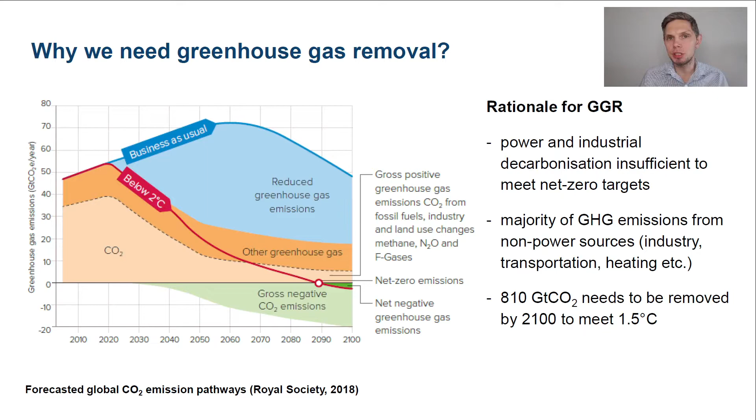So what is direct air capture? Well, direct air capture works in a very similar way to trees, and as you know, I love trees. I support planting trees, but we have to be realistic about how much we can actually achieve with planting trees. So we need to have alternatives. So direct air capture works as a kind of alternative engineered solution that removes much more CO2 than a single tree.

That's why most of the research that we do actually focuses on developing new materials, developing new ways to capture carbon dioxide from the air, and developing new equipment. And that's the most difficult part. So once you actually capture CO2 from the air in the air contactor, you need to release that. And that's the second part of the capture process.

So the first part is removing CO2 from the air in the air contactor, where the carbon capture material gets in contact with the carbon dioxide in the air, and then you have to release that carbon dioxide from that material. That can be done using either electricity, heat, pressure difference or moisture difference. Again, that step is fairly energy intensive as well, depending on the layout of the plant that you might want to consider.

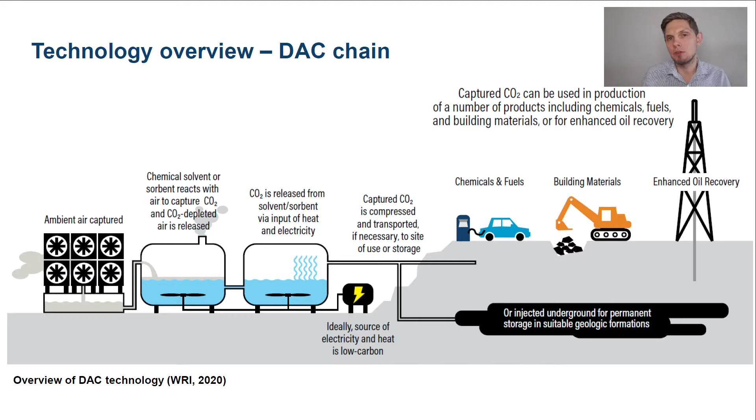But another opportunity is to store it underground, but we need to make sure that there is enough storage capacity to do it. Let me talk about the capture technologies, because that's where my expertise is right now, and this is something I'm very passionate about. In terms of direct air capture, we have two main archetypes that people talk about: high temperature capture and low temperature capture.

High temperature technology, like the Carbon Engineering concept, relies on an established process. You have the established Kraft process, where you use sodium hydroxide, also potassium hydroxide, to capture CO2 from the air. You produce sodium carbonate, and that sodium carbonate is regenerated using calcium hydroxide in the Kraft process, producing calcium carbonate.

This technology uses natural materials, which is quite promising, and uses existing equipment to some extent. The air contactor was based on the cooling tower, so that's a modification of existing equipment, which is very good. The only challenge and opportunity at the same time is that the regeneration of sorbent requires high temperature. In the calciner, you have calcium carbonate, which you have to calcine at 900 plus degrees Celsius, which requires combustion of fuel.

And that's the main challenge of that technology, because you have to either use fossil fuels to actually run it, or any sort of green fuel like biofuels, biomass or so. There is also potential to integrate that with solar energy, but that would add to costs quite significantly, I think.

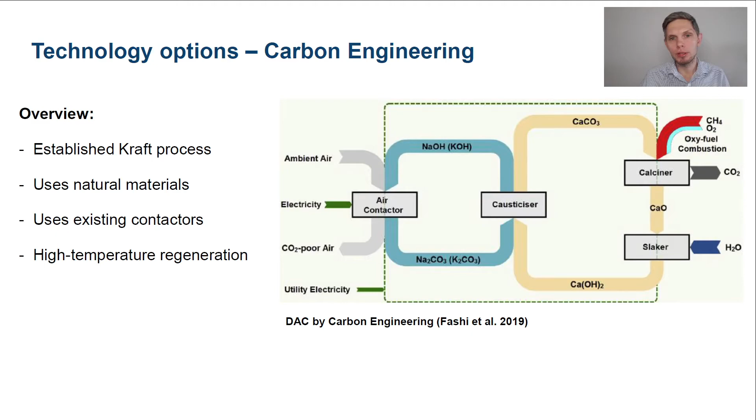Anyway, this high-grade heat, of course, it's a challenge to provide it because it's high temperature, but there is also an opportunity on the other side because you can integrate the waste heat recovery system and produce a useful amount of energy out of that process. On another end, we have low temperature direct air capture technologies.

For example, the ones that are developed by Climeworks or Global Thermostat. And these technologies utilize amine-based sorbents or resins to actually capture CO2. The operating principle is a little bit different because in this case you can have a single reactor that captures CO2, and once your sorbent or your capture material is saturated, you switch the conditions in the reactor and you release CO2. So it's either temperature swing or pressure swing adsorption.

Also, there is a potential to do moisture swing adsorption where you actually change the moisture content, and by doing so you regenerate the sorbent as well. The benefit of that technology definitely is that it's a low temperature system. So it requires temperatures of about 80 to 100 degrees Celsius, which makes it good for retrofitting within the existing industrial systems, for example, where you have excess waste heat. Or potentially it can be integrated with geothermal energy systems.

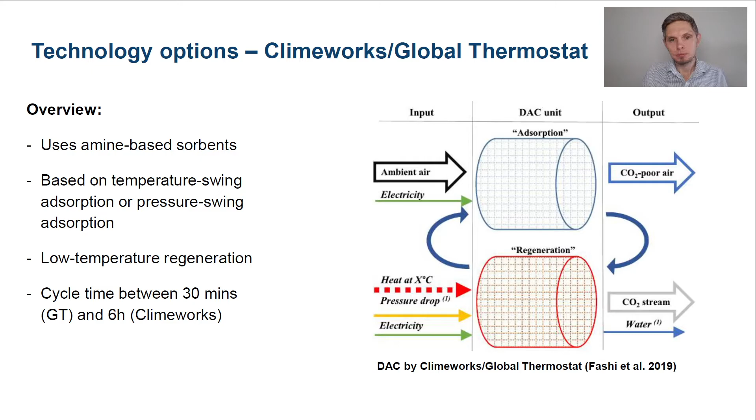Comparing those two archetypes, I collected data for those three companies that actually do direct air capture right now. So you can have a look at what are the main differences, and the main difference, of course, is operating temperatures. So you have 900 versus 100-ish degrees Celsius for low temperature direct air capture technology. The difference in purity I wanted to emphasize is, for low temperature direct air capture, you get in principle higher purity because you don't have any combustion products within your CO2 stream.

For high temperature systems, you would have combustion products if your energy in the calcination is provided by oxy-combustion of fuels. Energy requirements are broadly fairly similar. Of course, for Climeworks, I would need to add a range as well, but this will be somewhere between these two numbers. The only difference is that the Carbon Engineering system or high temperature system is a continuous process, so it's probably more scalable in my opinion.

Unit size can be bigger, while for low temperature systems you have cycles. So you have a cycling process where you alternate between adsorption and desorption of CO2. Of course, there is an opportunity to put several units in parallel, in series, that actually capture CO2 and ensure that you have continuous supply of CO2.

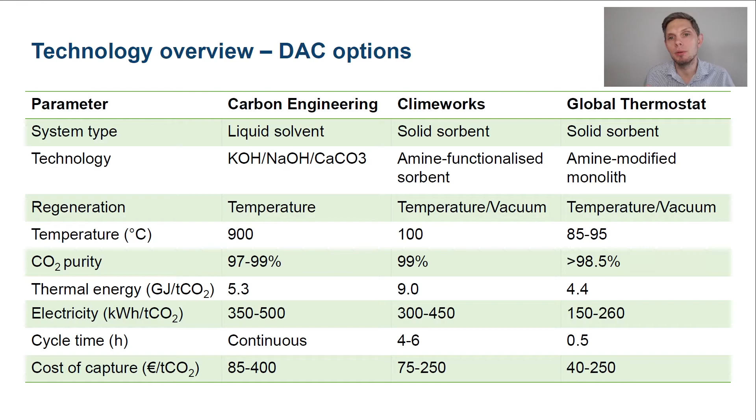So in terms of a high-level comparison, this is my personal view of how those technologies compare. High-temperature systems, in my view, are a little bit more scalable than the low-temperature systems. So definitely different markets for those. Energy requirement in terms of the grade of heat: of course, low temperature is better because you can collocate with other systems.

High temperature, again, is more energy intensive in terms of the energy grade, but then you can recover part of that energy as a part of the wider energy system. Purity is fairly comparable, again, depending on which technology you're going for.

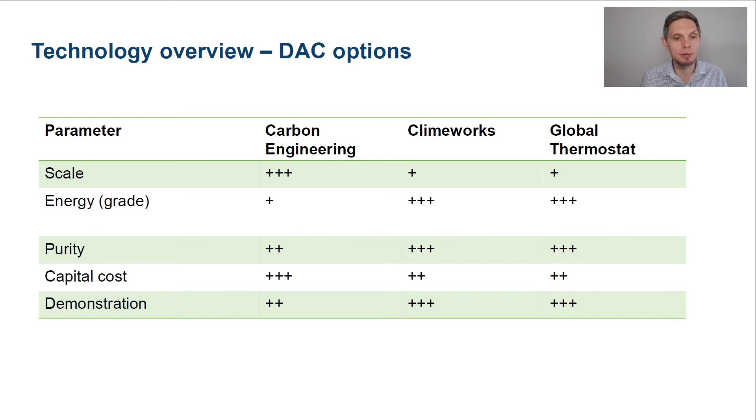Capital costs, I would see the low temperature will be a little bit cheaper than the high temperature, mostly because you have fewer reactors and you don't really have to have the combustion and all of this stuff. In terms of demonstration, I think the low temperature is a little bit further right now, more spread, more demonstration plants than the high temperature, but hopefully we see more of those demonstrations soon.

Now that we know how to capture it, I just wanted to emphasize there are existing markets for CO2 and there are different ways you can utilize CO2. There are either conversion routes or non-conversion routes. For the direct use of CO2, we can of course use it for yield boosting, say in greenhouses, to produce plants. We can use it for urea and fertilizer, which is also a good approach to actually use CO2.

But also new applications come up. For example, we can use CO2 as the working medium in supercritical CO2 cycles, which are much more efficient than conventional steam cycles, and that can of course increase energy efficiency and reduce our emissions in the first place.

In terms of conversion, as I mentioned already, we can produce fuels and chemicals. For fuels, the kind of projects that I'm working on look at how you can produce methane or methanol out of CO2, of course using hydrogen from renewables. What we need to make sure is that when we convert CO2 into fuels, we take the full life cycle analysis into consideration to make sure that this process is at least carbon neutral.

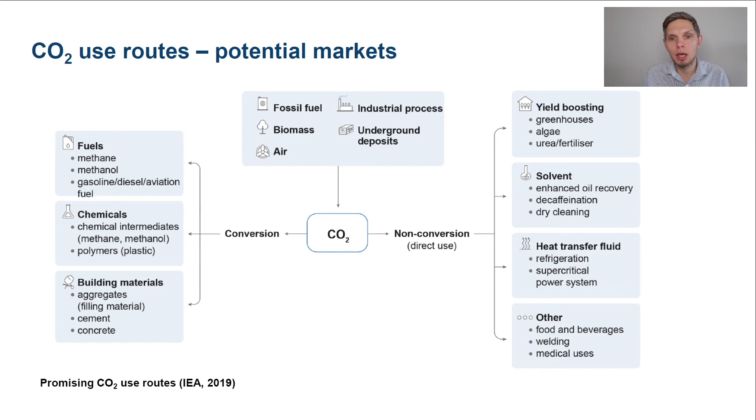Looking at the scale and environmental benefit, of course, production of fuels will have the largest potential to utilize CO2, mostly because we use so many fuels, in transportation, energy, we use fuels every day. So that's the largest potential in terms of utilization of CO2 for now. But in terms of the relative climate benefits, it's medium or moderate, I would say, because again, you would capture CO2, convert it into fuel, and then you release it again. So that could be a basis for a carbon circular economy in principle.

As I mentioned, a relatively high CO2 use is to produce concrete or aggregates out of the CO2 and use that for building materials, building roads, or something like this. This option has the largest relative climate benefit, mostly because you lock CO2 in. There are other opportunities for producing chemical intermediates like methanol, or converting those later into polymers. But then again, we enter into another issue of whether we should be producing even more polymers or plastic materials than we should be.

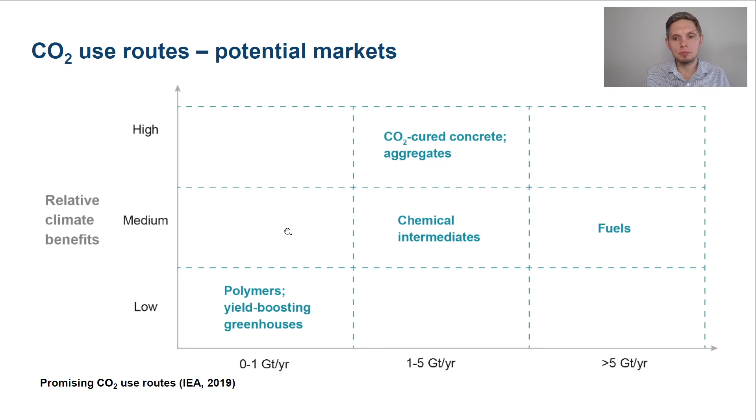So I hope this gave you a good overview of what direct air capture is, what the challenges are, and what the current trends are, and if you have any specific questions about direct air capture, I'm happy to answer those now or after this session.